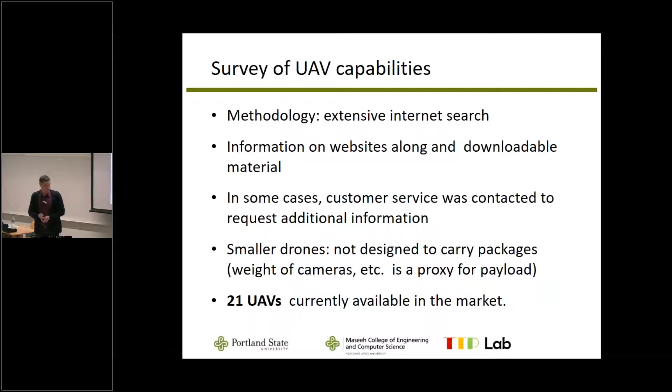So just to give you a sense about what kind of drones we were looking for. First, we focused on multi-copter drones, and those that can be potentially used to deliver things in urban and rural areas. And because we wanted to also think about urban deliveries, we narrowed the search a little bit. So we didn't include drones that are just helicopters, basically one propeller, because the size of the propeller is such that it would not be safe when they are in close contact with humans or property.

The other thing is we didn't include fixed-wing drones because they need special requirements or special facilities for landing and taking off. So it's not possible to have in an apartment building or in your backyard, typically, the infrastructure that you need for this type of drone. They are, for example, being used in Africa to deliver medicines or blood supplies and so on. So it would not be feasible for a dense urban area to have this type of drone.

And the other thing was we also limited the search to electric ones for two reasons. One, because in urban areas, the electric ones are noisy, but the ones that use combustion engines are much noisier. And also for environmental reasons, you have an extra burden of burning fossil fuels in the case of the other type of drones. So we limited the search this way.

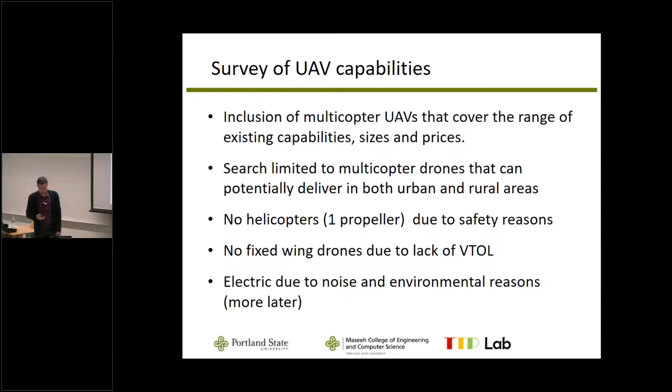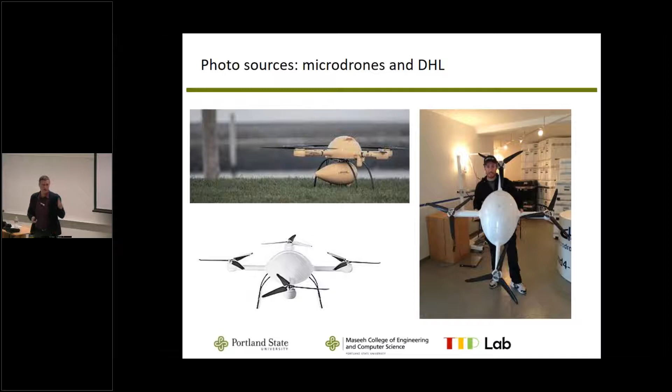And I wanted to include this picture just to give you a sense about the size of the drone that, for example, DHL in Germany is thinking about. And it's nice to put it in context here in relation to a person that in this case is carrying the drone. And what I mentioned before about having 4 propellers instead of 1: imagine the size of that 1 propeller, you would not want to be near that one, yeah? But you see it's a considerable size if you want to carry a package. And that obviously has some issues in terms of how you deliver in tight, small spaces in urban areas. So this was the type of drone we were thinking about in terms of our survey and the model that I'm going to present.

There is a wide range of capabilities, so just to give you some idea, you get a flavor of what drones can do today. In terms of speeds, they are actually pretty good. They can have a cruise speed between 35 and 45 miles per hour. So if you think that roads or streets are congested or you have a lot of traffic signals, if you are able to fly at 40 miles per hour without stopping, it's great. It's very competitive.

The flying times, though, and this is related to battery, are still not great. They are mostly limited to 20 to 30 minutes. And if you combine the speed and the flying time, that gives you a sense of the range, because the drone will have to go and come back and still have a safety margin. We are talking about nothing beyond 10 to 20 miles, but that range is also a function of the load. So the heavier or bigger the package you want to deliver, the more the range will decrease.

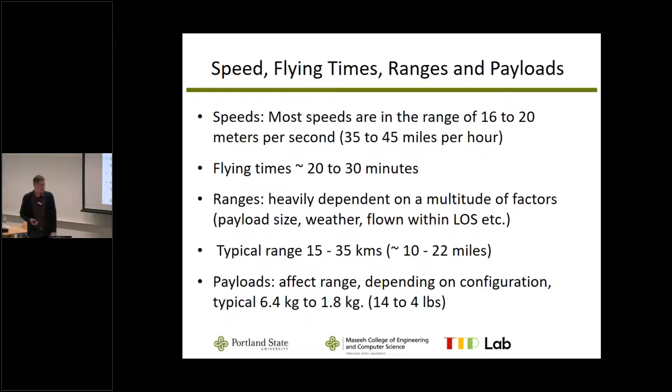So it's kind of pretty complicated. There are many factors, but just giving you some idea. And again, the payload, roughly you think about 2 to 6 kilograms, 4 to 14 pounds.

So size and weight, and again, this is kind of important in terms of considering what is feasible in an urban area. The average size across the diagonal, so we're talking roughly 1 meter, yeah? So 1 meter in terms of just the diagonal of the frame. You have to add the propellers. So the size is not tiny. We're talking about things like this at least.

And the takeoff weight, so one thing is the payload, but then you have to add the weight of the frame, the propellers, the engines, the batteries, and so on. So it could be up to 10, 15 kilograms, so we're talking up to 30 pounds. You need to think now that also, if you have 20, 30 pounds traveling at 40 miles per hour and they crash, it can have a safety impact. But we're not focusing on safety today, just looking at sustainability.

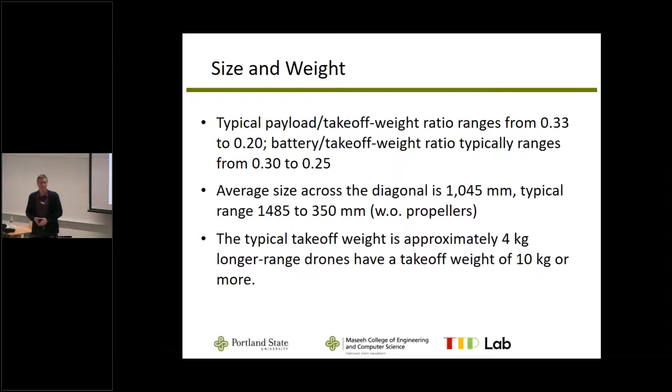So I'm going to go back to the topic and the cost. Again, maybe you got for Christmas one of these tiny ones, could be $100, but the ones we are talking about delivering something around 10 pounds, you're talking like $20,000 to travel, say 20 miles. So it's a wide range of costs that are associated with what you can do in terms of payload and travel distance.

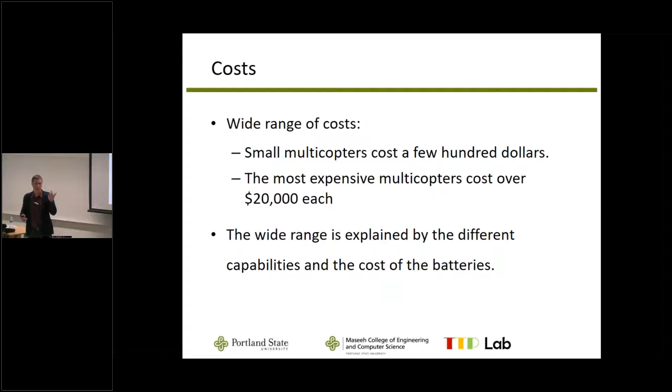So just to give you a sense about what is the configuration of a good drone for deliveries, like the ones DHL was considering, and one of these typical old-fashioned vans that we can see as a service utility vehicle in the US. So we have 4 rows here, the gross weight. So you see 15 kilograms versus 4,000 kilograms. So we're talking about a big order of magnitude.

The same thing with the curb weight. The payload, again, huge difference. And the maximum range, again, very, very different too in terms of what you can do with the maximum energy that you can pack into the vehicle.

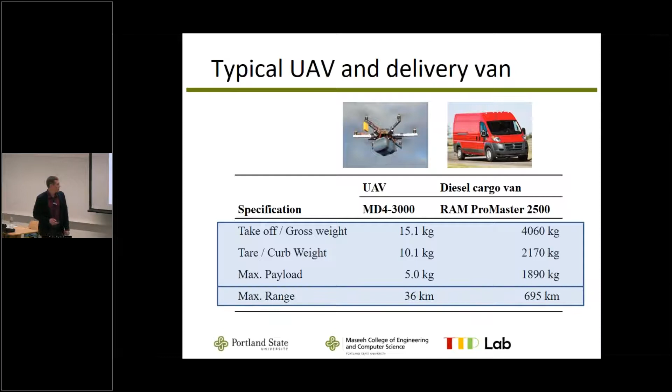So I'm going to start this presentation with the simplest case. So imagine that for that last mile delivery, that last leg from the hub or the distribution center to the customer, we use a drone. So we have to take off from our distribution center, go to the customer, and come back. So one drone serves one customer round trip.

The comparison here is then against using a small van to go from the distribution center to the customer and come back. So the van just goes one way and then comes back. So it's the easiest possible case trying to compare the two vehicles.

So what we're going to see here is that the energy consumption, assuming a package of say 5 kilograms, roughly 10 pounds, in terms of watt-hour per kilometer, we're talking about 21 for the drone, and we're talking about 1,000 for the van. So if you're just delivering one small package, it's clear that in terms of energy consumption, the drone is much, much more efficient.

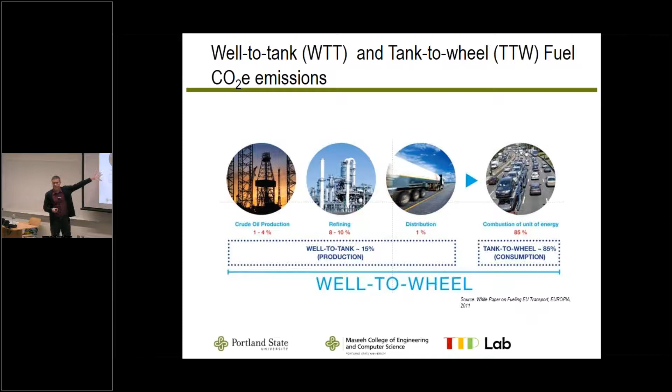You can look at the statistics, say for the Pacific Northwest: given the energy mix of generation here in terms of gas, coal, hydro, nuclear, and so on, you get some carbon footprint on average per kilowatt hour. So we can take this into account and add it to the calculation. Using numbers associated with our region, for electricity we have 1.23 pounds of CO2 equivalent per kilowatt hour.

And if we look at the fuel, the emissions associated just with moving that gallon from the oil fields to the refineries and so on is 5.108, and then we have 22.7 associated with burning that fossil fuel. So these two numbers are roughly 28 versus 1.2. We see that in terms of emissions, drones will be much better per kilowatt hour of energy consumed.

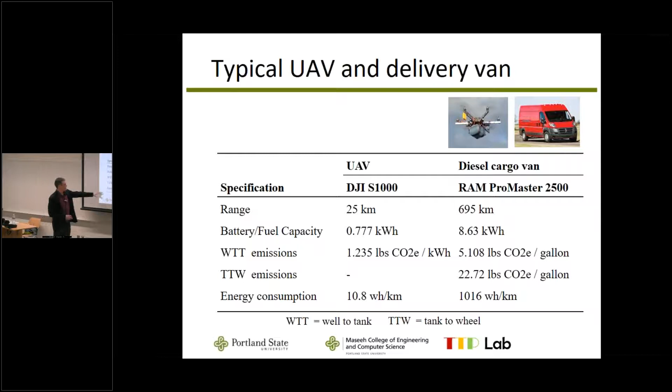So if we multiply, we get 10.8 and 1016 watt-hour per kilometer. If we apply these coefficients, per unit distance the UAV is roughly, again an easy number to remember, 1,000 times cleaner in terms of CO2 emissions. This is combining the energy efficiency with the carbon footprint of the energy source. So to deliver one package it is much better to use drones if you have to deliver just one.

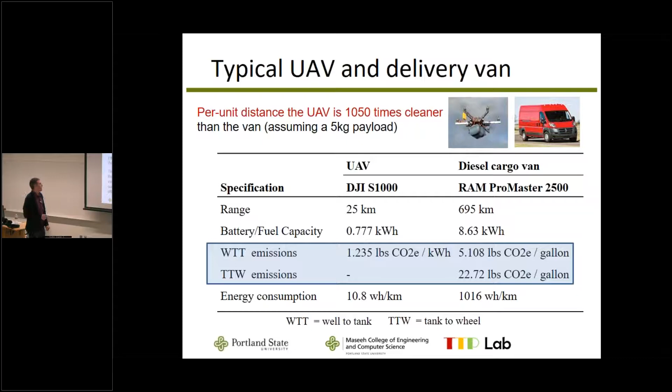But again, if we assume the van is fully loaded, then the van is almost 2.7 times less efficient regarding CO2 emissions. This is just using this van. It is not the most efficient vehicle in the market, but I'm using it to give you an idea of the comparison against this type of vehicle. I'm going to present more efficient vehicles later on, and you will see the numbers change. So in terms of CO2 against the not so fuel efficient van, even when it's fully loaded, the drone is better.

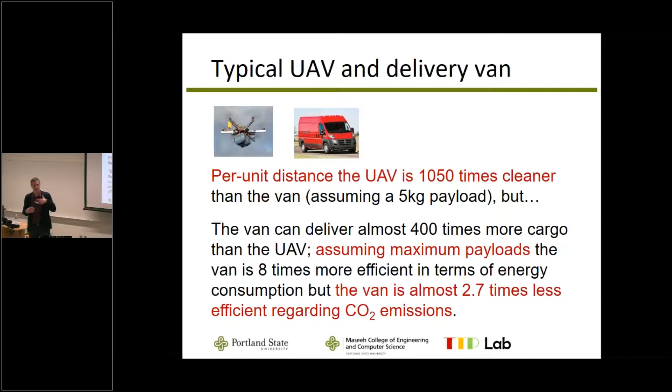Now we're going to move to a case that is slightly more complicated. Instead of one-to-one deliveries, we have what we call one-to-many. The van can go from the warehouse and deliver to n customers. N could be 50, 100, 150, whatever is allowed given the number of hours the driver can work and so on. Because the van can now combine customers, it's going to become more efficient. On average, as the number of customers per route increases, the distance traveled per customer decreases. So every time we add a customer, on average, the van becomes more efficient.

All the formulas are in the paper, so I'm not going to show any formulas, but if you want to check the numbers, it's all there. For the sake of time, I'm not including formulas in the presentation. What I'm going to present now are tables looking at energy efficiency break-even points. Basically, I'll show you numbers where the drone is equivalent to the van for a given set of conditions in terms of energy efficiency.

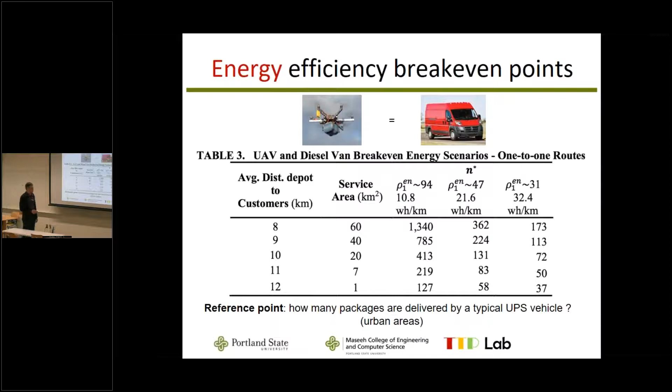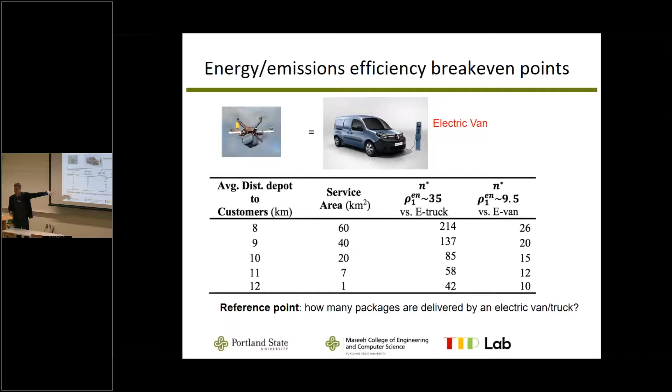So then we are lucky to have here in Portland B-Line, that is tricycle, human and electric powered delivery vehicles. You might see them. They service campus and office buildings around downtown.

So we did some study with them, and we got to measure what is the energy efficiency of these tricycles, starting from the depot on the east side to deliver here to downtown. And then if we do the same thing, we compare a drone versus using a tricycle, then we see that only having 2 customers, 2 deliveries, 2 packages using a tricycle, that will break even with the drone. So meaning that if you deliver 3 packages using a tricycle, then you are more energy efficient than you would be with a drone.

And in this case, with electric vehicles, that issue about the carbon footprint doesn't change because now they are both using electricity. So before, when we were comparing with the diesel van, we had to add that penalty for the carbon footprint of diesel. But here, because we're comparing electric with electric, we don't need to make that adjustment anymore.

I was just wondering, when you look at the energy efficiency of those tricycles, do you also look at the extra calories burned by the individual operating it? That's a good question, but we didn't. And we didn't for the reason that we were just measuring, from the battery before and after, what was the actual consumption. And if we start taking that into account, then you can say, well, there is a health benefit too. So the short answer is no, but the long answer is we didn't do it because then you will need to consider many other things if you want to be fair.

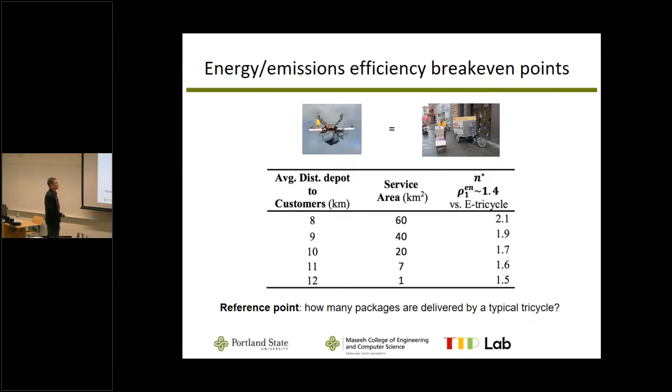So there is one more thing that when we are talking about sustainability we need to think about, and that's the life cycle of the vehicle. It's fairly easy to think about just the energy and the CO2 associated with that energy, but then you need to think that to manufacture that vehicle, you need to use energy for the materials, for assembling, and so on. So there is a lot of energy that is necessary to create a vehicle.

So people have worked on this life cycle analysis that can take into account all these different components, and then you can get the statistics for the typical vehicle, what is the carbon footprint of manufacturing. But at the end, you also take into account disposal, because there could be elements like the battery, given the metals and some of the processes that are required, that may be harder to recycle than other materials like steel or aluminum. So it's a topic on its own.

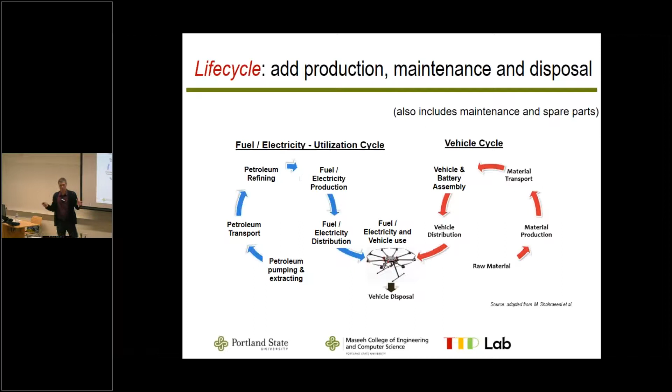But if we take this into account, then we need to make some assumptions, and in a way divide these vehicle emissions over the life of the vehicle. So in this case, we assume on average 4 deliveries for the UAV, 25 for the tricycle, that's what we see in Portland, and for the van 150. And then assuming that vehicles operate 52 weeks, 5 days a week, you have different lifespans in terms of what the vehicles are likely to last. Again, we don't have enough information about UAVs, but we have pretty good information about other vehicles. So making some assumptions here, we can get these numbers about emissions per delivery.

So then you see that in terms of the vehicle CO2, the drones have a much higher contribution in terms of the vehicle itself. If we put this in equivalent travel distance, it's pretty high for the drone, meaning that the vehicle component for a drone delivery is roughly like flying 13 extra kilometers per delivery. But it's tiny for the other vehicles just because they are used so much over 10 years. That's why, even though they are bigger, they are used much more over the lifetime, so the contribution of manufacturing the vehicle becomes much smaller.

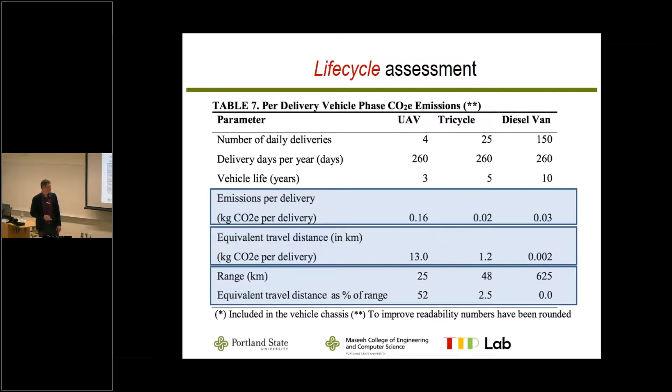So just to wrap it up, and I don't want to talk for too long. So just summarizing, the drones are great in terms of low energy and low CO2 emissions per unit distance. So if we are talking about delivering one package or one thing in a remote area, it's much, much better to use a drone than to use one ground vehicle, even if we take into account the vehicle phase emissions. But in terms of

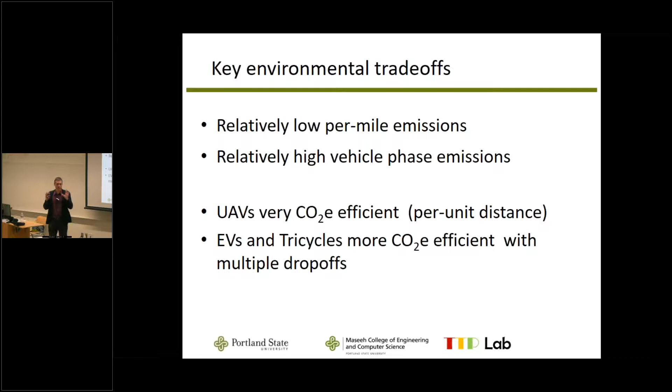deliveries in areas where you can have routes with many customers per route, then the UAVs are not as efficient, and then we saw there is a break-even point where they become less efficient. So for urban deliveries, compared to a well-used delivery tricycle or electric van, or even in some cases an efficient diesel van, drones will not be more sustainable. But again, that's assuming a lot of high efficiency on the ground vehicles.

So just to wrap it up, I'll go very quickly. So I mentioned all this, this is an analysis done based on the vehicles, but as you know, nothing is being delivered yet on a massive basis to customers. So there are still many, many logistical barriers to consider for these drones to be implemented, in terms of how not the last mile, just the last yard of the delivery is going to happen, safety issues. And then the payload, again, is a big limiting factor in terms of what you can deliver up to that amount.

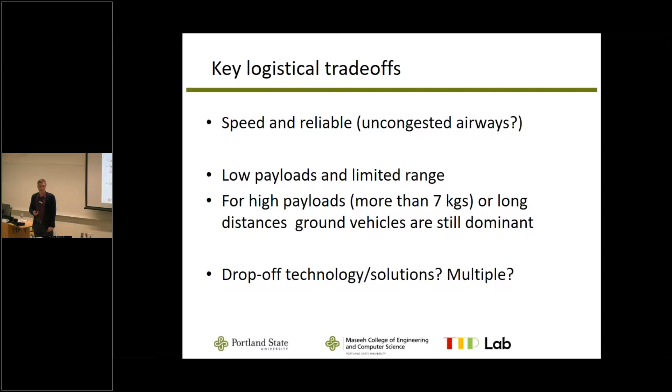And again, the drop-off. There are many, many startups and people thinking about different options, but no one has still come up with an idea that regulators are happy to say, yes, this can move forward and become a massive system. I'm not going to talk about economics. We're running out of time.

But I want to mention that another issue that is still important and pending is traffic control. So if you think about this system scaling up in terms of drone deliveries, we have traffic signals for controlling our streets. You would think that it's necessary to have a system that would coordinate all these vehicles to avoid crashes and issues in terms of safety. So that's still a big issue. Again, like with any autonomous vehicle, ground or airborne, there are still issues in terms of liability or what may happen when something goes wrong.

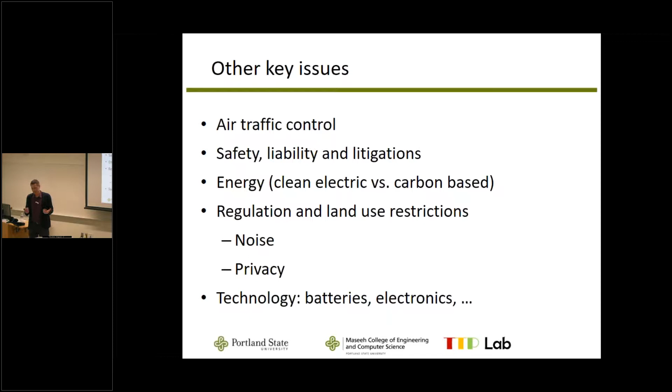So energy, again, I think the future of drones for urban delivery is going to be electric. And then it's not very clear yet how people are going to react if this becomes widely available in terms of the noise, the privacy issues, and so on. Still not clear what's going to happen. But for sure, technology is improving very, very fast. So batteries and the drone itself, these vehicles are becoming much better. That's something we know for sure.